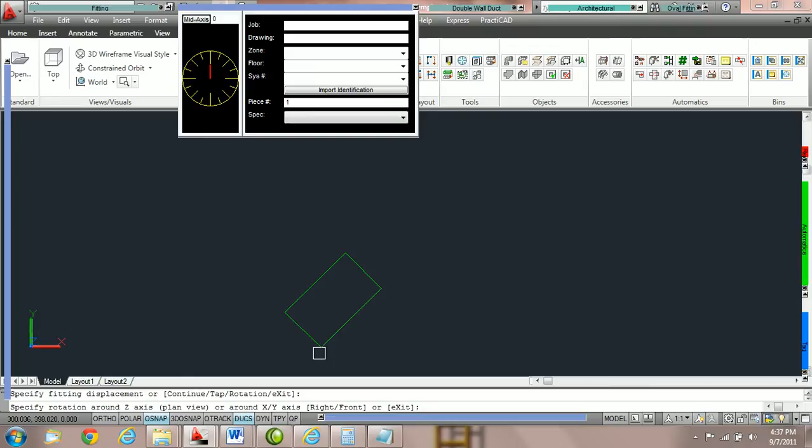If we switch it to mid-axis, Practicad will allow me to snap my duct at 45-degree angles to the drawing. This is usually what we use polar tracking for in your AutoCAD options down here. So this is just a simple feature to allow you to control the degrees at which Practicad duct or entities can spin.

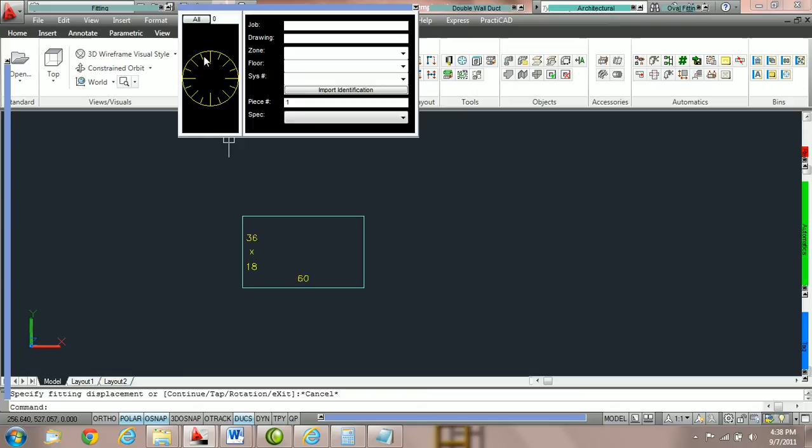Another feature inside your direction box is the direction wheel itself. I'm going to grab an elbow and then use C for continue to snap the elbow to the piece of rectangular duct. Notice the second it snaps, Practicad puts a little red line in the direction wheel and shows that the angle the elbow is at is 0 degrees.

Airflow of the fitting or the in-out connection dictate the degrees. So the elbow is turning to the right, that is 0 degrees. If we would like to switch the elbow to the left, all we need to do is reverse the side, and now you'll see the elbow will be turning to the left, and Practicad shows us that it's 180 degrees.

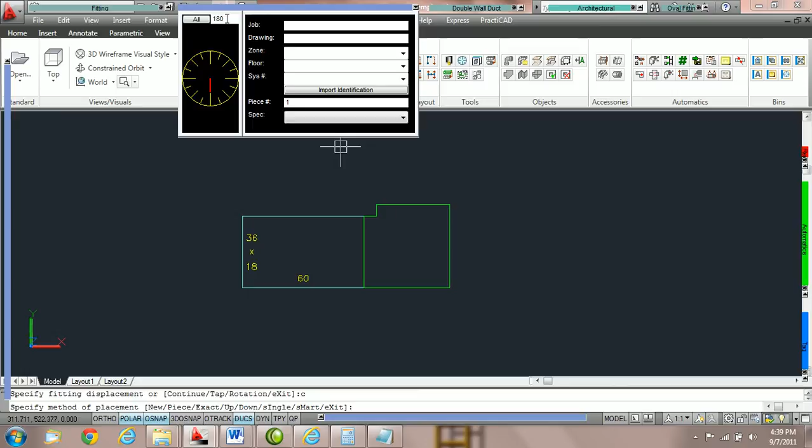We can also rotate it down. You can notice it's rotated down because an X will appear whenever the duct is rotated down, or we can switch it to the opposite side and we can rotate it up. Obviously, if we're dealing with round duct, we can also click on midpoints to rotate things at specific roll angles. In this tutorial, since we're using rectangular duct, we're only going to rotate it around 90 degrees.

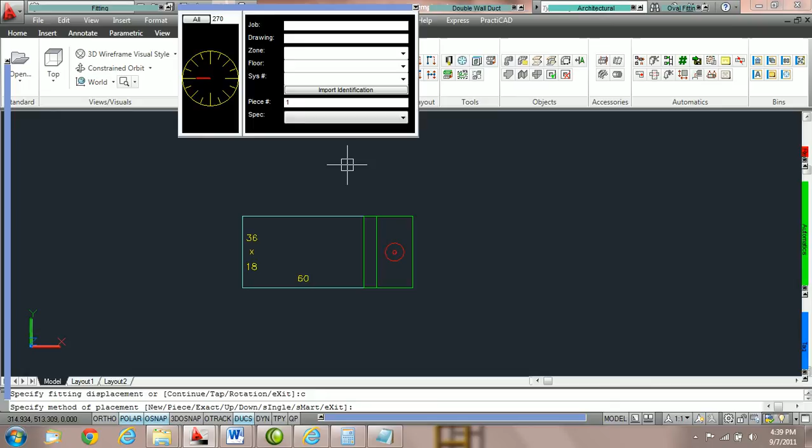And now we can obviously control the roll angle of the elbow if we'd like to edit directly from the direction wheel by just clicking on the line we want. Or we could just keypad in the exact roll angle we need. For example, if we would like to rotate this at 15 degrees, we can just type in 15 in our parameter box here. Once we hit enter, it's going to rotate it at 15 degrees.

This way we can edit our duct later or give specific roll angles to all of our entities. That'll conclude the tutorials on the direction box.